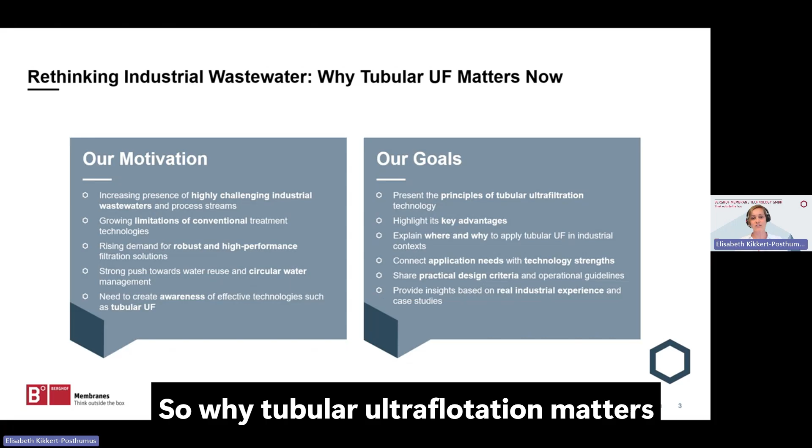So why does tubular ultrafiltration matter now? Our motivation includes a few bullet points we will go through: the increasing presence of highly challenging industrial wastewaters and process streams, growing limitations of conventional treatment technologies, rising demand for robust and high-performance filtration solutions, a strong push towards water reuse and circular water management, and the need to create awareness of effective technologies such as tubular ultrafiltration.

Our goals are to present the principles of tubular ultrafiltration technology, highlight its key advantages, explain where and why to apply tubular ultrafiltration in industrial contexts, connect application needs with technology strengths, share practical design criteria and operational guidelines, and provide insight based on real industrial experience and case studies.

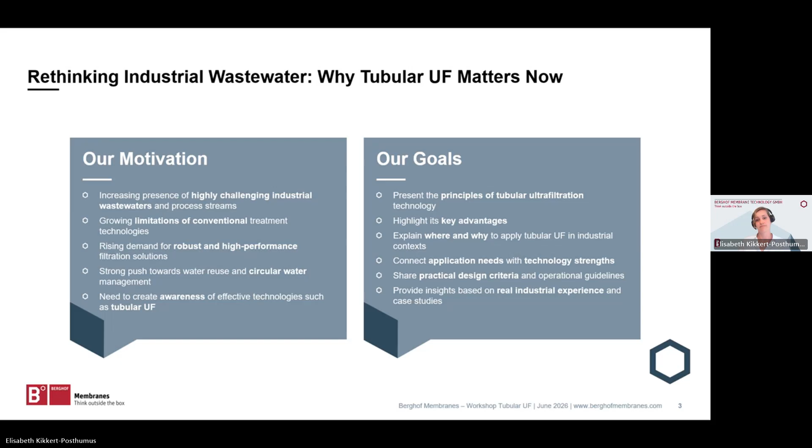Berghof Membranes is a leading manufacturer of tubular UF membranes for the filtration and separation of industrial wastewater and process streams, serving industries like dairy, food and beverage, landfills, chemical, pharmaceutical, biogas plants, oil and gas, and many others.

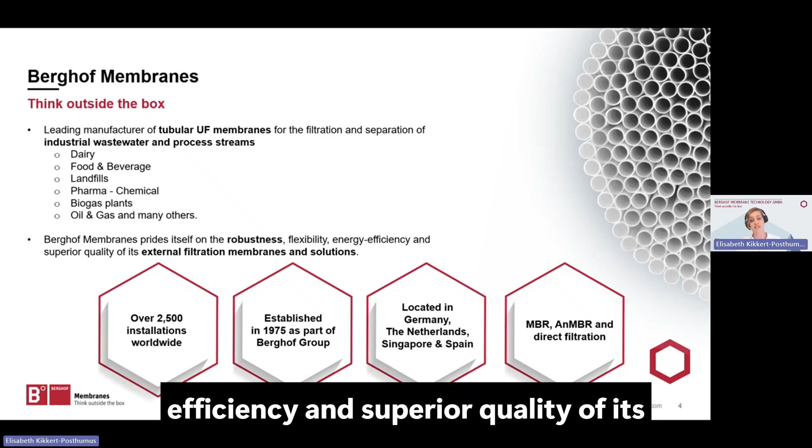With more than 50 years of experience and over 2,500 installed systems across the globe, we pride ourselves on the robustness, flexibility, energy efficiency, and superior quality of our external filtration membranes and solutions. We're located at 4 sites: Germany, our manufacturing location, and offices in the Netherlands, Singapore, and Spain. Our core technologies are MBR, AnMBR, and direct filtration.

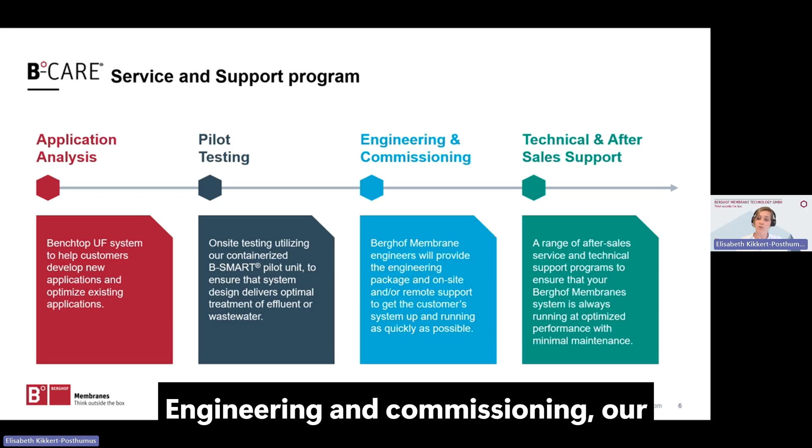Our B-Care service and support program involves application analysis, to develop and optimize our customers' applications; pilot testing, on-site testing with our containerized pilot unit, ensuring the system design delivers optimal treatment; engineering and commissioning, our engineering package with either on-site or remote support for starting the system; and technical after-sales support, a range of services to ensure the system always performs with minimal maintenance.

So let's get into detail and rethink the treatment of industrial wastewater and why tubular ultrafiltration wins. It's my pleasure to introduce our first speaker, Dr. Elena Meabe.

Elena is the manager of the Knowledge Center at Berghof Membranes. She is a chemical engineer and holds a master's degree in environmental engineering. She also holds a doctorate in industrial engineering, with her PhD research focused on membrane bioreactor technology and the monitoring of membrane performance. She has 18 years of experience in filtration technology, mainly dealing with external tubular membranes, and has deep insight into membrane technology for the industrial wastewater treatment market. She will now guide us through key insights on today's topic. Elena, thank you for being here, and I'll pass it on to you. The floor is yours.

Okay. So, hello, good afternoon. I will activate this. So I think now you can see my screen and everything is working well. Let me just do one thing. Okay, I think everything is going on.

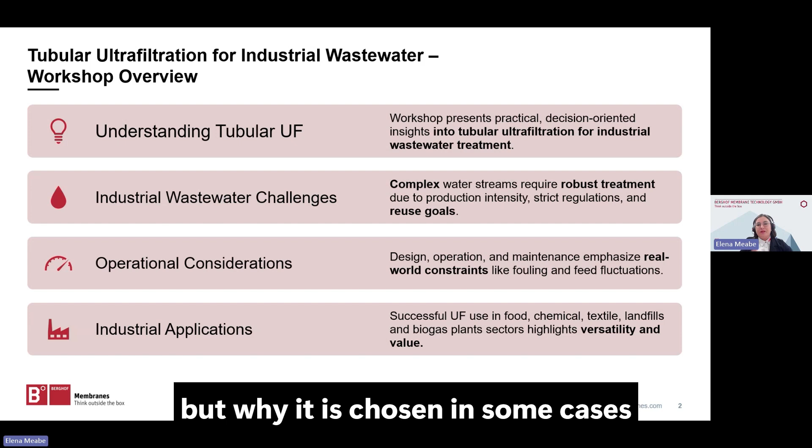the basis of this tubular ultrafiltration technology. So for this, we will start with the fundamentals of tubular ultrafiltration and then move into the main industrial wastewater challenges. We will also look at general design guidelines, operation, and we will finish with typical applications and specific case studies. So the intention is to connect membrane theory with real plant decisions, understanding not just how tubular ultrafiltration works, but why it is chosen in some cases and not in others.

So, well, industrial wastewater is fundamentally different from municipal wastewater. We are often dealing with high solids concentrations, oils, refractory organics, streams that can vary significantly depending on production cycles, batch operations, CIP events. So this variability creates shock loads that conventional systems often struggle to handle.

At the same time, discharge requirements are becoming stricter, water reuse is gaining importance, and many plants still face space and uptime limitations. So before selecting any technology, it is essential to understand the real complexity of the wastewater and the operational constraints around it.

So, well, the big question becomes, when does tubular ultrafiltration make sense? This is really about application fit, right? It is finding the right technology for the right challenge. And this is what we are going to explore in the next slides.

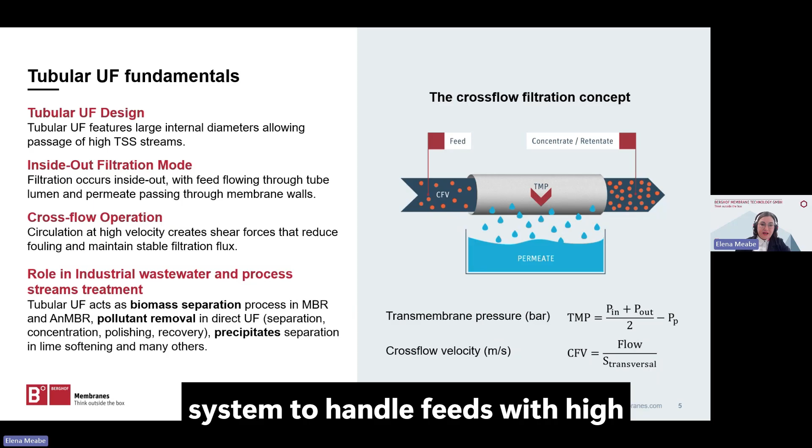So, well, the basis. Tubular ultrafiltration is defined by a few essential characteristics, okay? First, the channels, the membrane tubes, are relatively large, which allows the system to handle feeds with high suspended solids or viscosity. Second, filtration takes place in an inside-out mode, where the feed passes through the tube and the permeate crosses the

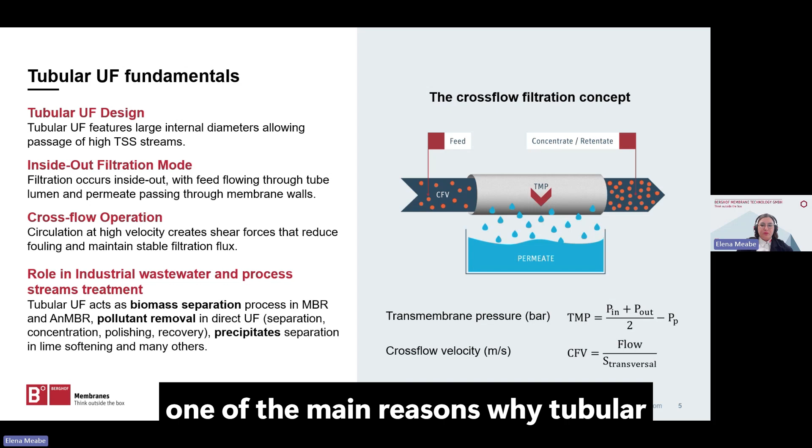membrane wall. And third, the system operates in crossflow, meaning that part of the liquid is continuously circulated to create a shear at the membrane surface. So this shear is key because it controls fouling and keeps filtration stable over time. This cross-flow concept is one of the main reasons why tubular ultrafiltration is considered robust for difficult industrial streams.

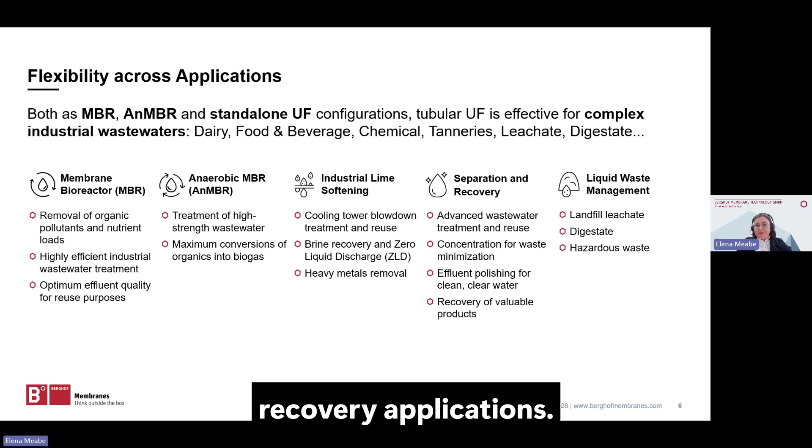Apart from this, one of the strengths of tubular ultrafiltration is the flexibility across many different process setups. It can be connected to a biological process as part of a membrane bioreactor or anaerobic membrane bioreactor. It can be coupled to a chemical precipitation process for removing hardness, silica, heavy metals, or other dissolved pollutants, or it can be used as a standalone ultrafiltration step for separation, concentration, polishing, recovery applications.

And well, the application range in terms of industries is also very broad, from dairy, food and beverage, chemicals, tanneries, leachate, digestate, waste management, many of them. So let's say that this is not a niche technology for one sector, but a platform technology for complex liquid streams.

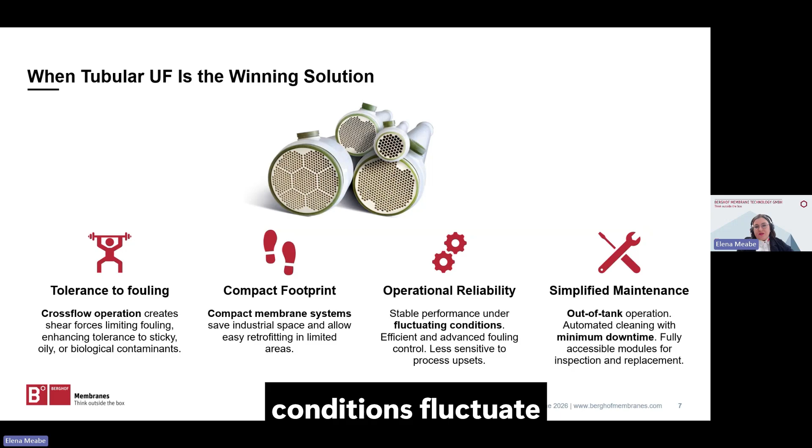Here in this slide, you can see that tubular ultrafiltration becomes a strong option under specific conditions, okay? So, for example, when the wastewater has a high fouling tendency, when available space is limited, when the feed conditions fluctuate strongly, or when maintenance needs to be simple and with minimum downtime. In this kind of scenarios is when tubular ultrafiltration excels and delivers its real advantages.

It is also important to say that tubular ultrafiltration is not always the lowest cost option from a pure CapEx perspective, okay? But in many challenging industrial cases, it becomes the most reliable and practical solution because it tolerates difficult feeds better and also provides more stable operation.

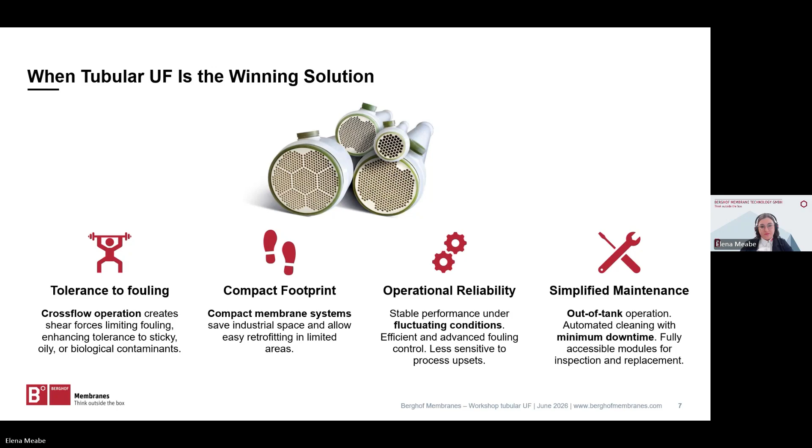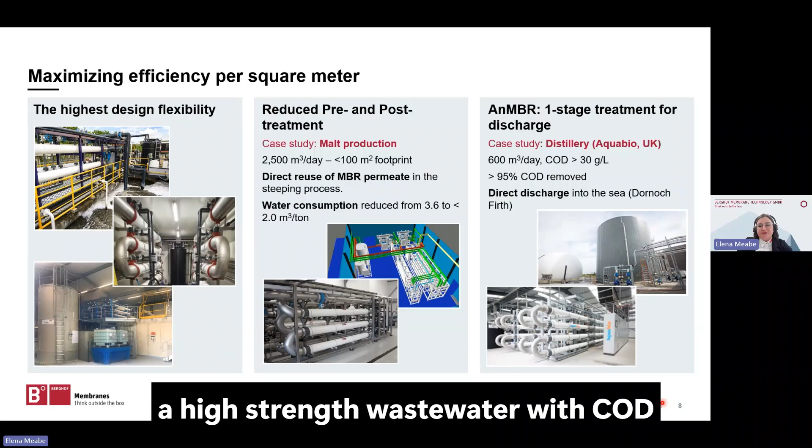this is a distillery application, a high strength wastewater with COD even above 30 grams per liter, which is treated with anaerobic MBR. So in this way, energy is produced for the factory. This system achieves COD removal higher than 95%, and this again enables direct discharge into the sea.

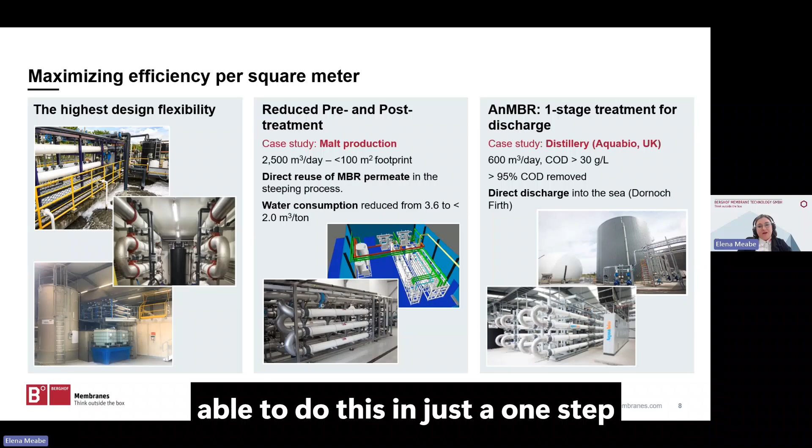Well, I can tell you that as far as I know, there is no other anaerobic technology apart from the anaerobic MBR which is able to do this in just a one-step treatment. Okay, so now we are going to move from why to how. Up to this point, we have focused on why tubular ultrafiltration can be the right choice. Now we move to the next step, which is how to design and integrate ultrafiltration properly into the treatment plant.

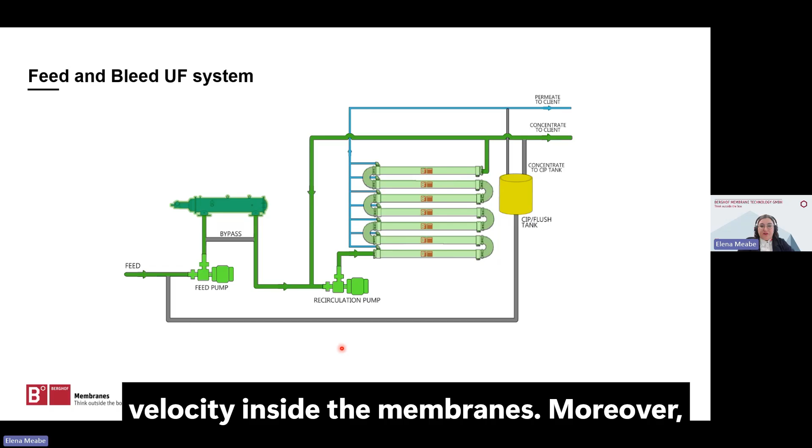This slide shows a typical feed and bleed configuration, which is the most common when designing tubular ultrafiltration systems. In this arrangement, there are two pumps, feed and recirculation, and there is a continuous recirculation inside the membrane loop. This is to maintain the cross-flow velocity inside the membranes. Moreover, the feed pump introduces a certain flow to the recirculation loop. Part of this flow is obtained as permeate, and the rest is the concentrate or retentate stream.

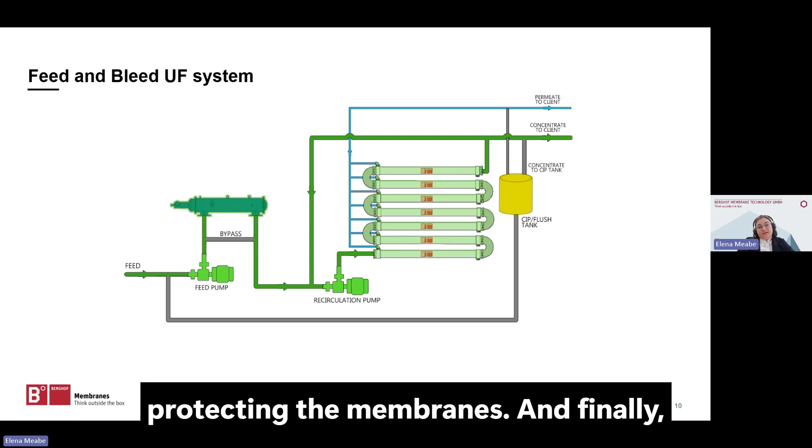The ultrafiltration modules are usually installed in series, usually up to 6 or 8, depending on the design cross-flow velocity. And also, we always recommend installing a safety strainer after the feed pump for protecting the membranes. And finally, the only thing that you need to install is the CIP flushing tank for membrane flushing and cleaning.

So when designing and operating a tubular ultrafiltration system, a few parameters are especially important. This includes transmembrane pressure, pressure drop, cross-flow velocity, recovery, concentration factor, permeate flux, permeability. But what matters is not only each parameter individually, but also how they interact. For example, increasing flux may improve productivity, but it can also accelerate fouling. Or increasing cross-flow improves fouling control, but it also affects energy demand. So optimization is always a balance between productivity, reliability, stability, and operating cost.

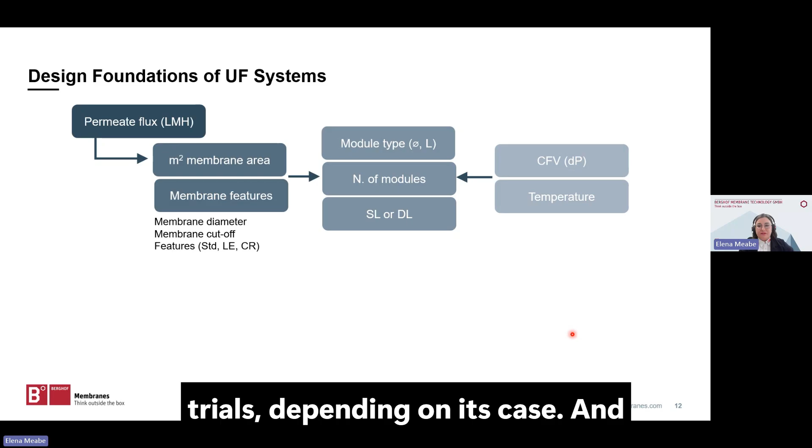System design. This is essentially about connecting process requirements to equipment selection. The main design parameter is the permeate flux. This value is determined based on background experience or pilot trials, depending on each case. And then, based on flux, we need to define membrane area. And also, depending on the application and the wastewater characteristics, we select the membrane type, diameter, cutoff, module configuration, for example, backwashable or chemical resistant modules.

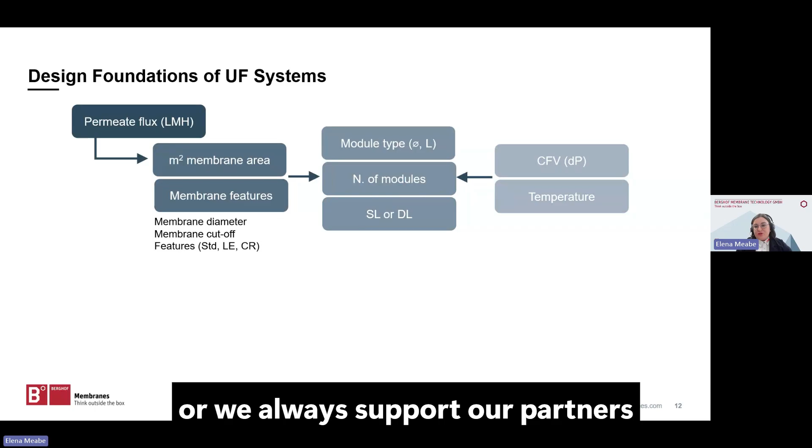Once we have this selected, we need to select the most adequate module size, diameter, and length. As a general approach, we try to select the smallest module which gives a reasonable number of modules in series. This is generally more energy efficient. I mean, it is better to install 4 modules in series of a certain size than installing just 2 modules in series with a bigger diameter. For all these kinds of decisions, of course, we always support our partners and customers in finding the best solution for each specific case.

Then, if because of the project capacity we need to install more than one skid, we can go for single loop or double loop. A double loop is like 2 membrane lines which are fed with the same recirculation pump. And also the permeate lines are interconnected. Double loop is better in general in terms of capex, but it can reduce flexibility, okay?

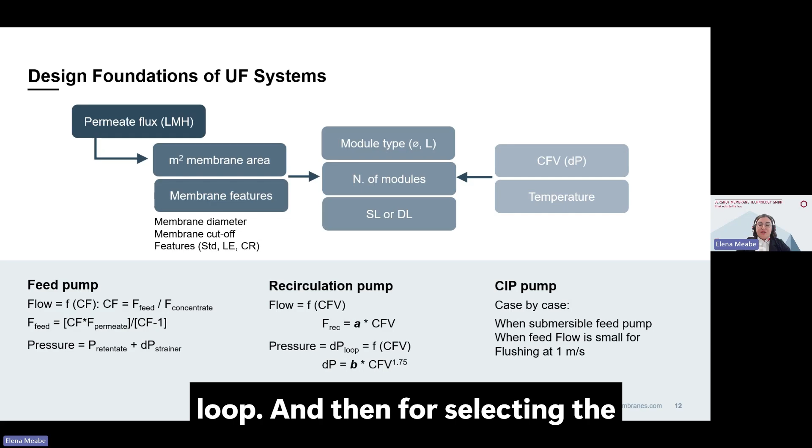Okay. On top of that, the pump sizing is critical. For the feed pump, the flow is based on the chosen concentration factor, which is the ratio between the feed and the retentate flow. And concentration factor sets the solids concentration inside the loop. For example, a concentration factor of 1.2 means that MLSS will get 20% concentrated in the ultrafiltration loop. And then for selecting the feed pump pressure, we need to consider the retentate pressure, which is the pressure at the outlet of the last module, and also the pressure drop in the safety strainer. Then the recirculation pump.

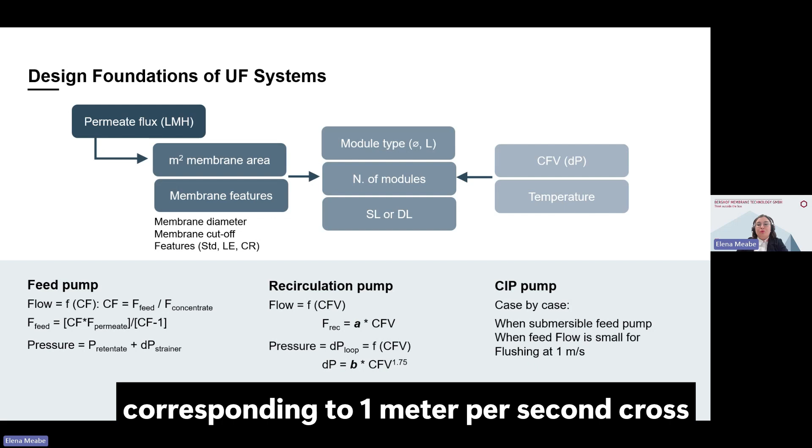The recirculation flow depends on the target cross-flow velocity. And the recirculation pump pressure is the pressure drop along the modules, which is also dependent on the cross-flow velocity. And finally, a dedicated CIP pump is installed in some cases. For example, when the feed pump is submersible, or in many cases when the feed pump is not able to provide the flow corresponding to 1 meter per second cross-flow velocity inside the tubes. This is the requirement that we have for the membrane flushing.

For me, the point here is that not every application needs the same level of complexity. So the system should match the technical demands of the process and also the operational expectations of the plant. So, operation mode. Tubular ultrafiltration is not limited to filtration alone. In addition to the filtration step, the system must also include other operation modes, such as flushing, CIP, conservation, and in some configurations, backwash or chemically enhanced backwash.

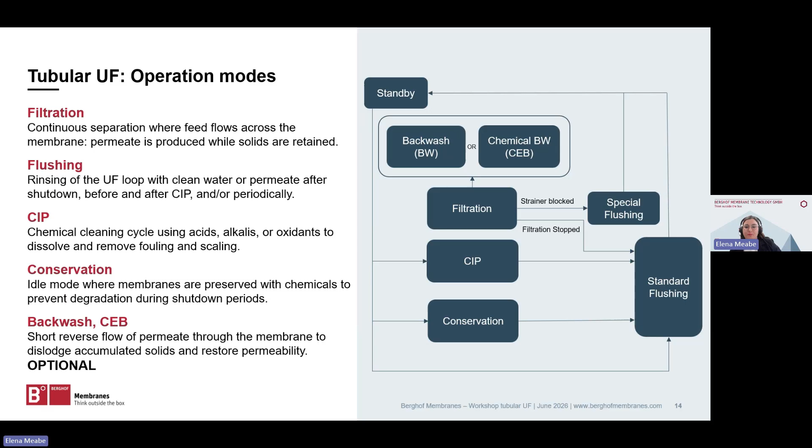Each of these modes has a specific role. Filtration produces permeate, flushing removes residual solids or pollutants when the system is stopped or before and after a CIP cleaning, or flushing can also be implemented periodically to control fouling. CIP restores permeability with chemicals, and conservation protects the membranes during shutdown periods. Then for flushing, UF permeate can often be used, but for CIP, we always recommend to use tap water or demineralized water. And moreover, when tap water is used, it should have low hardness, for avoiding scaling during the alkaline cleaning.

So now let's focus on the process integration around the UF. First, even though tubular ultrafiltration is very robust, it requires pretreatment. Pretreatment is still important. So typically some form of screening is required to protect the system from big solids or hairs, fibers, etc. As a standard, rotary drums with 0.75 or 0.8 millimeter mesh size are used. The screen should be square mesh or perforated plate. Slots are not recommended as they only provide the required sizing in one dimension.

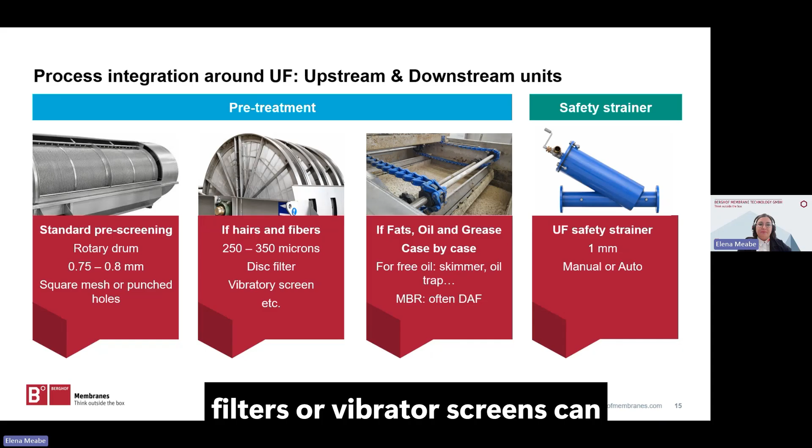Then, if hairs and fibers are present, a finer mesh is usually recommended in the range of 300 microns or even less. And for these, filters or vibrating screens can be used. Then, if fats, oil, and grease are present, additional pretreatment might be necessary in some cases. If there is free oil, we recommend removing it with simple equipment such as an oil trap or oil skimmers. Regarding emulsified oil, tubular UF membranes can cope with it. In fact, we have several projects dealing with oil-water separation where the membranes are facing really high concentrations of oil and grease, even more than 100 grams per liter. So this is not a problem for tubular ultrafiltration.

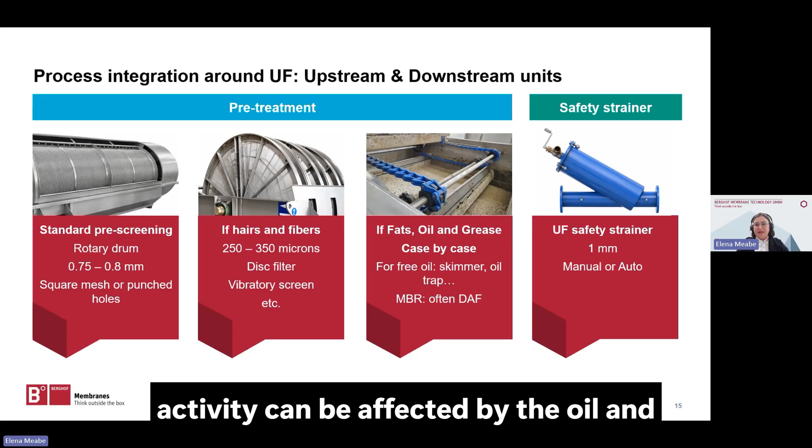There is a special case, which is the aerobic MBR, where DAF pretreatment is often installed when oil and grease is present. More than by membrane limitations, this is related to the biological reactor, where oxygen transfer and biological activity can be affected by the oil and grease, and also some kind of foaming or greasy superficial layer can appear on the bioreactor.

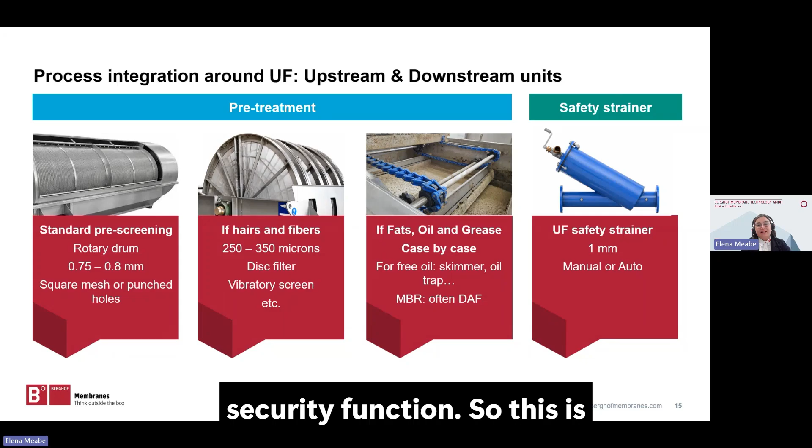Then, after pretreatment, we have the safety strainer in the UF system. We usually recommend a mesh size of 1 millimeter, and strainer cleaning can be manual or automatic. This depends on the case or on the customer's preference. Important: safety strainer mesh will always be bigger than pretreatment mesh. This is because pre-screening has the function of structurally removing debris from the incoming water. The strainers in the feed line of the ultrafiltration only have a security function. So this is important. Safety strainer mesh is always bigger than the pretreatment.

Finally, beyond the ultrafiltration system itself, proper integration into the overall process is essential. So upstream, the interaction with the feed tank or bioreactor must be carefully considered. For example, liquid height can influence pressure conditions in the ultrafiltration. With tall tanks, feed pressure is usually available, but retentate pressure will increase. So this means that in some cases, people even install a retentate pump instead of a feed pump. Or when retentate pressure increases, the maximum number of modules in series can also be affected. So this needs to be considered when designing a system.

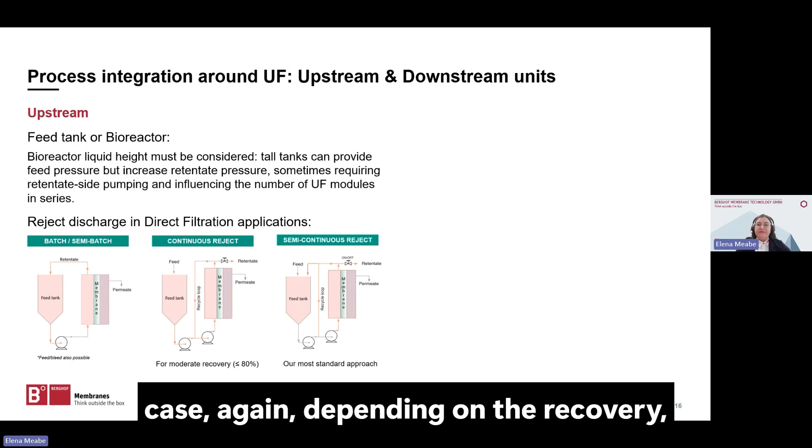We also need to think, for example, about how the concentrate or reject stream is handled in direct filtration applications. One option is batch or semi-batch operation, or we can extract the reject from the retentate stream, from the ultrafiltration loop. So in this case, again, depending on the recovery, the system can operate with direct reject or with partial recirculation to the feed tank and semi-continuous reject.

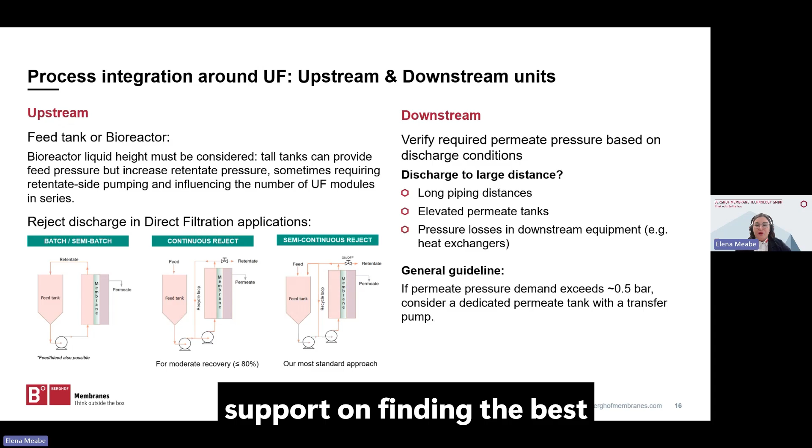Then, downstream side. The key question is the required permeate pressure. Long piping distances or elevation differences or additional equipment can create pressure losses in the permeate pipe. So, as a rule of thumb, our consideration is that if the required permeate pressure exceeds about 0.5 bar, it is often better to include a dedicated permeate tank with a transfer pump. Again, this can be customized based on each project, and we can also support on finding the best solution for each project.

And finally, when it comes to operation and maintenance, monitoring the right parameters is critical, as in any system. So we usually design ultrafiltration systems with permeate flow control. It can be done manually or automatic, but we recommend this mode of operation in terms of stability.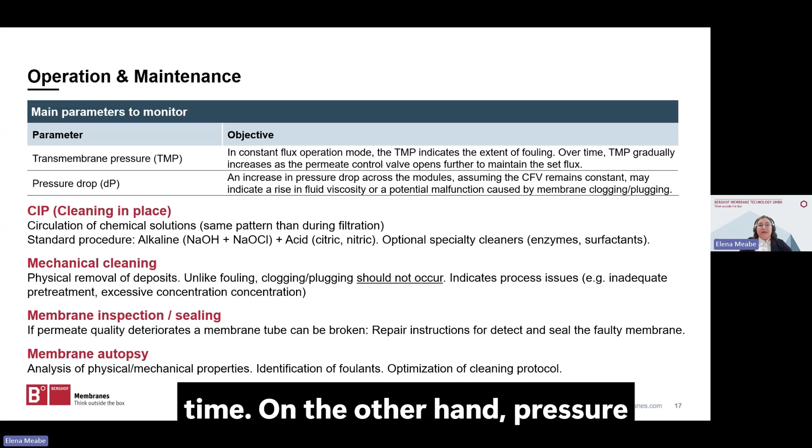So when you operate in a constant permeate flow, transmembrane pressure is the key indicator of fouling development over time. On the other hand, pressure drop across the modules needs to be also monitored, as it can indicate changes in viscosity, but also any potential clogging issues. So pressure drop in the loop is also an important parameter to monitor.

Then chemical cleaning. This is also an essential part of operation, because it needs to restore the functionality of the membranes. As you may know, standard CIP procedures typically combine alkaline oxidant and acid cleaning to remove organic and inorganic fouling. And in some cases, special chemicals such as enzymatic cleaners or degreasing boosters are highly efficient for certain circumstances.

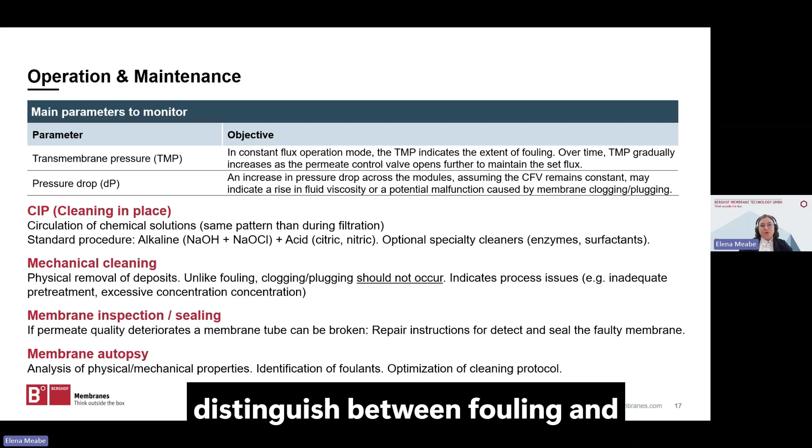Then we have mechanical cleaning. First of all, it is important to distinguish between fouling and clogging. Fouling is expected and happens in any membrane installation. You apply the CIP cleaning and the system is performing again and at its maximum, let's say.

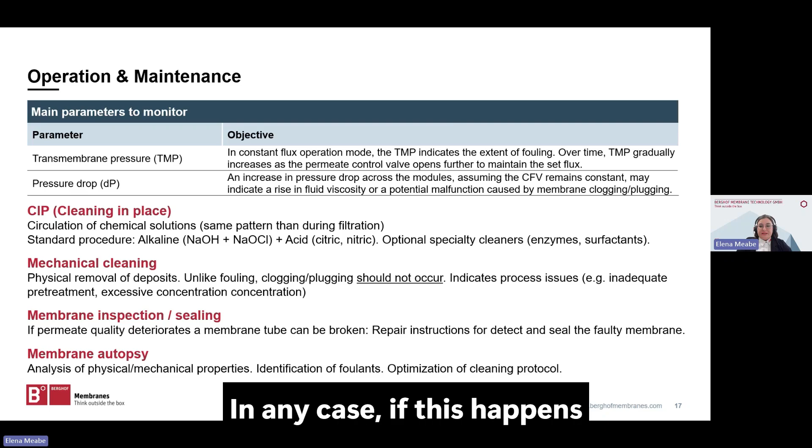But clogging, which is the mechanical blocking of the membranes, is something that should not happen and usually indicates a process or pre-treatment issue, some kind of operation which is not performing well. So clogging should not happen. In any case, if this happens for any unexpected reason, deposits can be removed physically with mechanical cleaning.

We also have procedures for the operators to inspect the membranes if required. And in the case that for some reason one membrane tube gets damaged, the module can be repaired with a simple procedure. So you can still continue using the module without any problem.

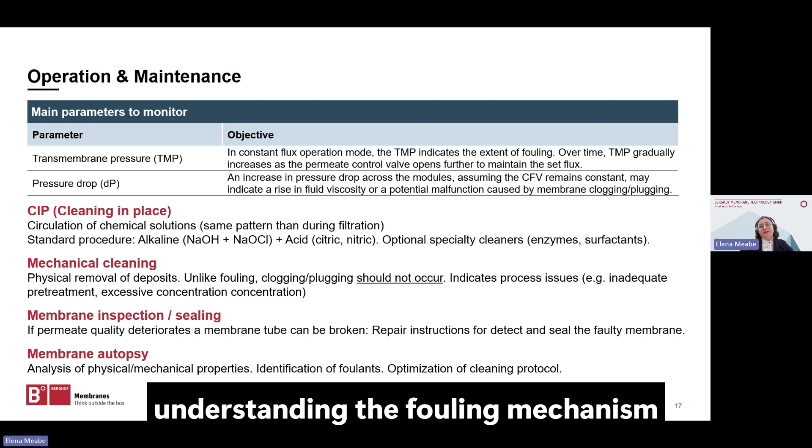And finally, as part of our services, we also offer the option to carry out membrane autopsy studies, which is something usually demanded by some operators. Basically, membrane autopsy helps better understanding the fouling mechanism and also, which is really important, optimize cleaning strategies.

So with this, I reach the end of my presentation. I would like to thank you for your attention. I hope that this session has helped you clarify when tubular ultrafiltration is the right solution and how to approach from the basis its design and operation. And now my colleague Adrian will go from theory to practice and will focus on typical scenarios and real case studies. Many thanks, and we will see you later again at the Q&A session.

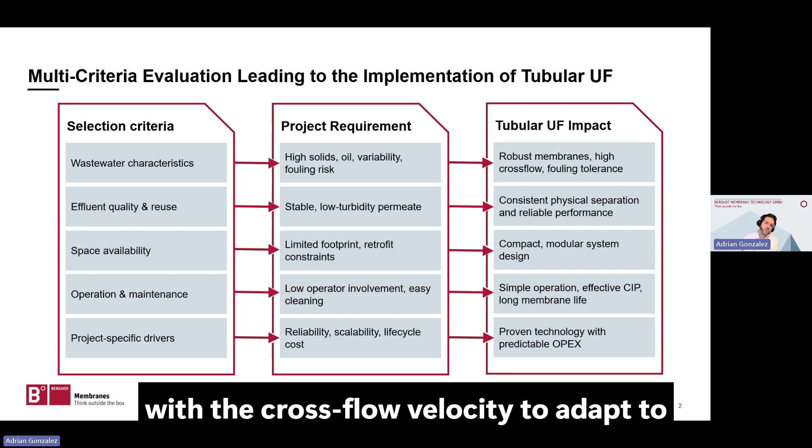For instance, when we look at the wastewater characteristics, in industrial waters which have either high solids, high oil and grease, high variability, high fouling risk, then the use of the external system is going to give a robust system capable of handling this fouling potential. We can play with the high cross-flow velocity, but also play with the cross-flow velocity to adapt to these challenging and variable conditions that industrial wastewater normally possesses.

If we then, for instance, look into industries where the effluent quality matters, or they are looking into permeate reuse, or a permeate that has low solids and is stable, in those cases, what we are going to be able to achieve by applying external membranes is a permeate free of solids, so low turbidity. And on top of that, it's going to have a constant permeate quality, even if the pretreatment is not working as well as it should.

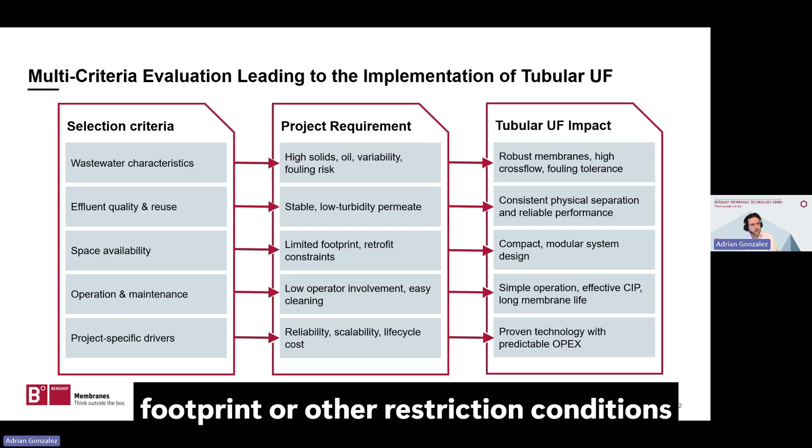Space availability. I think Elena showed already nice examples when limited footprint or other restriction conditions are in place. We can present a flexible and modular system. So you can think of skids on top of a bioreactor, on top of a platform, in the basement of a building. So always with these modular systems that can adapt to these space constraints.

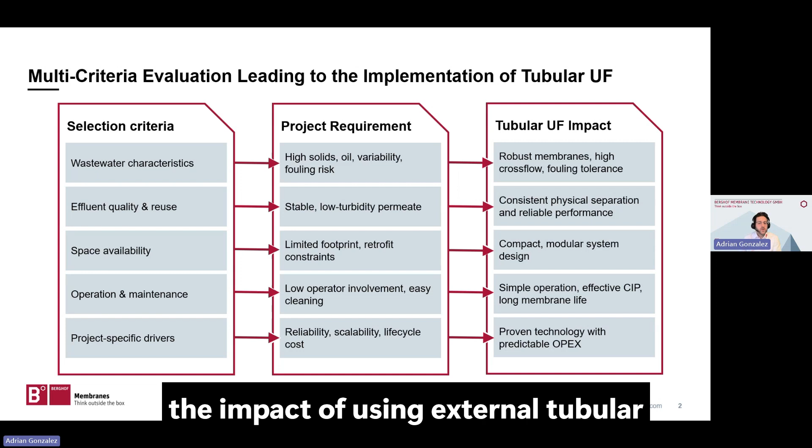OpEx, operation and maintenance. For sure, it's something that we and your clients are looking into these days. And by that, we are also thinking of the ease of operation of the system, and whether there are operators available on site to operate the systems. So again, using external tubular membranes is going to give a simpler operation with a long membrane lifetime. And there are many other selection criteria and project requirements that might lead to tubular being the winning solution compared with conventional treatment. But if one or two are present, then it makes sense to start thinking of external.

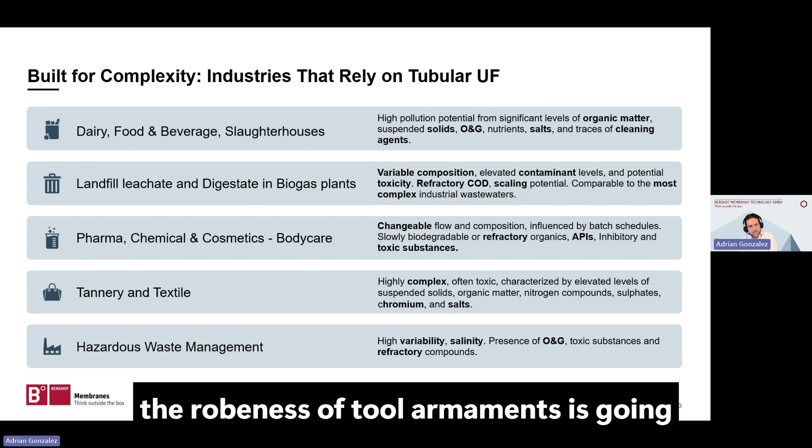Then landfill leachate and biogas plants. In biogas plants, we can think of the treatment of digestate or the anaerobic system, so anaerobic MBRs. Those are definitely the most complex waters we can think of, waters with variability of the influent flows, variability also in the composition, high levels of contaminants. So again, tough and challenging applications.

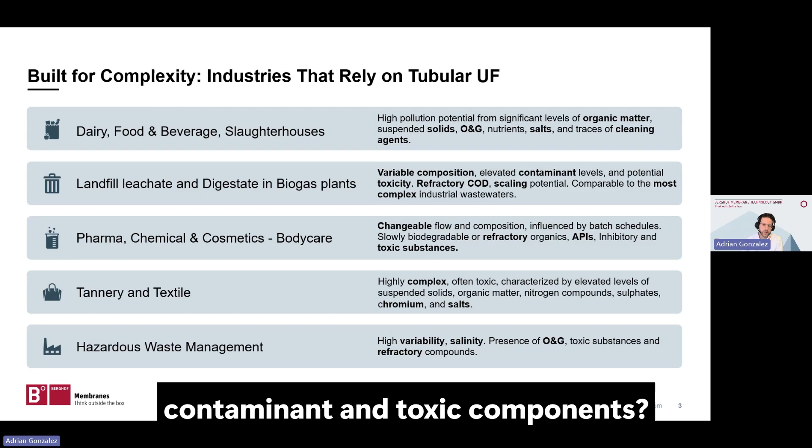At the same level perhaps as landfill leachate, we can think of hazardous waste, where there are streams of different natures. So chemical waste, paint, waters that have high levels of contaminants and toxic components. Not to stop here, but you can also think of pharma, cosmetics, laundries, industries where they operate in batches, where different products are being produced, which also means that there is variability in the composition of these waters that is going to affect the treatment being applied.

So we now have an idea of the selection criteria and project requirements for when we need to start thinking about applying external membranes. But perhaps it's good now to look at some case studies and examples where this has been the winning solution.

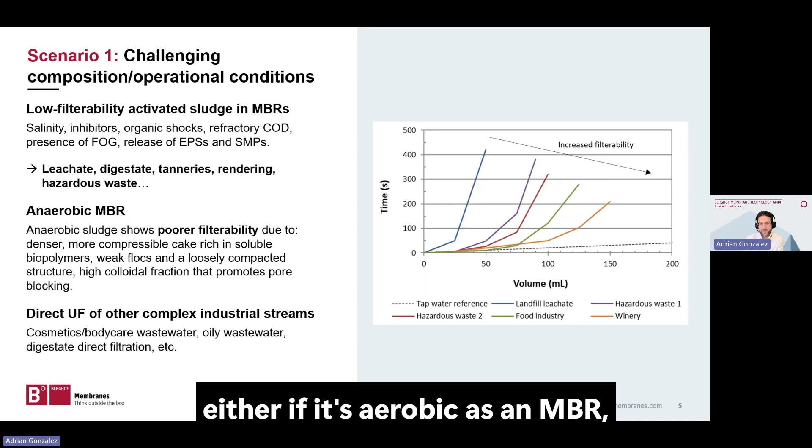First scenario, however, I'd like to focus still on a theoretical point of view. As Elena introduced briefly, external tubular membranes can be applied directly in contact with the wastewater, or in combination with a biological system, whether aerobic as an MBR, or anaerobic in the absence of oxygen.

When membranes are applied directly in contact with wastewater, we can think of many different industries. Cosmetics, for instance, to reduce the volume of waste generated and reduce discharge costs, or for further processing of digestate to remove the high suspended solids present in biogas plants.

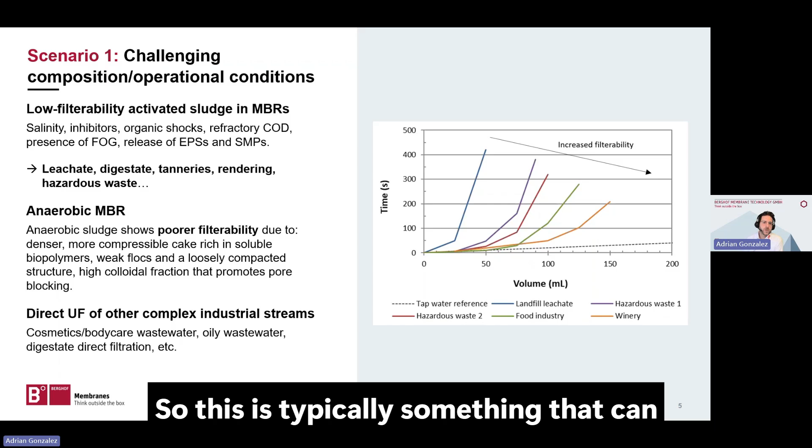From the point of view of MBR and anaerobic MBR, tubular membranes are a strong fit, especially in systems where sludge filterability is low and operating conditions are especially demanding. Think of waters with organic shocks, refractory COD, high salinity, inhibitor components, or where the biomass is releasing EPS, deteriorating the sludge quality. This typically happens in leachate, digestate, tanneries, rendering, and hazardous waste industries.

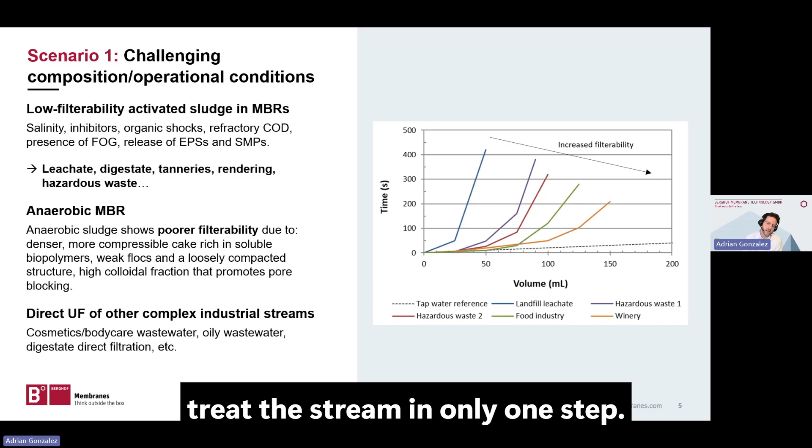In anaerobic systems, we again encounter challenging operational conditions, and in those cases only external tubular membranes are the right fit. Generally the biomass shows poor filterability, is rich in biopolymers, and has a colloidal fraction. In those cases, external membranes are the only solution, and as Elena said, they allow treating the stream in just one step.

Let's look at some case scenarios now, from a practical point of view, which I think is really the most relevant. First case: why does it make sense to reconvert a system, for instance, to an MBR?

Think of a client with an SBR or conventional activated sludge system. By reconverting this treatment, which might not be up to date, we can directly improve the biological performance and effluent quality, potentially for reuse strategies. So we improve not only the permit quality, but also expand the hydraulic and load capacity of the system if it's not capable of handling variable or increased loads the client might be facing.

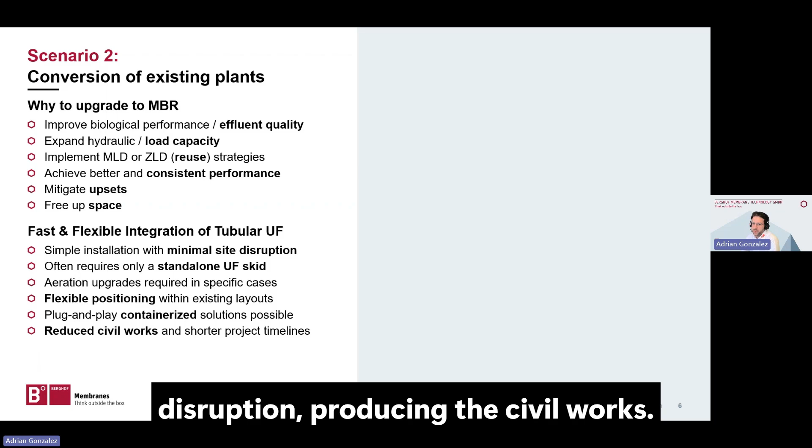The implementation of tubular membranes is fast and flexible. This can be integrated into a simple skid installation with minimal disruption, reducing civil works. In SBR systems specifically, the aeration is already ready for this reconversion, because it's normally designed for a shorter period of time, so when expanded to 24 hours, there's enough capacity for this.

Let's put this into a case study. This is a chicken slaughterhouse project in Belgium, executed by our partner, Aaqua. The client had a problem: they were facing an increase in capacity and had water costs they needed to look into reducing. Their current SBR system was not enough for this.

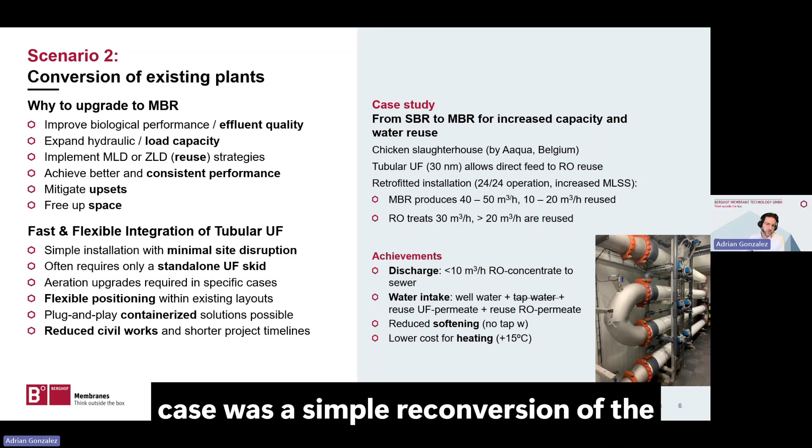The solution Aaqua presented was a simple reconversion of the SBR system, for which the aeration was already ready. It simply went to 24-hour-per-day operation, increasing the MLSS.

With this plus further treatment with reverse osmosis, they were able to face the increased capacity. Overall, the client is able to treat about 50 cubic meters per hour with the MBR system, from which 20 cubic meters per hour are reused directly for lower quality demand, such as floor cleaning and truck cleaning. The remaining 30 cubic meters per hour were further processed with reverse osmosis treatment, and from this, 20 cubic meters per hour were again reused within the process, in this case even for direct contact applications.

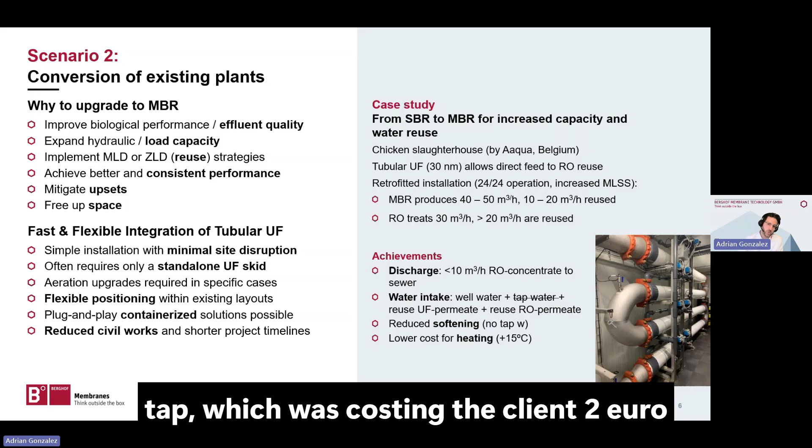The discharge of the reverse osmosis could be directly to sewer with even higher quality than the existing treatment plant. So with this simple solution of system, the client was able first to face this increased load capacity, to reduce the water consumption from the tap, which was costing the client €2 per cubic meter in this case. Actually, the quality of the reverse osmosis was even higher than the tap water, so avoiding softening, and the temperature was also higher, avoiding heating of the water.

Let's go now for a third scenario, where we focus on waters with high solids. Normally high solids also means high viscosity, it's correlated, and poor filterability. Those are systems where conventional membrane systems are going to fail to perform.

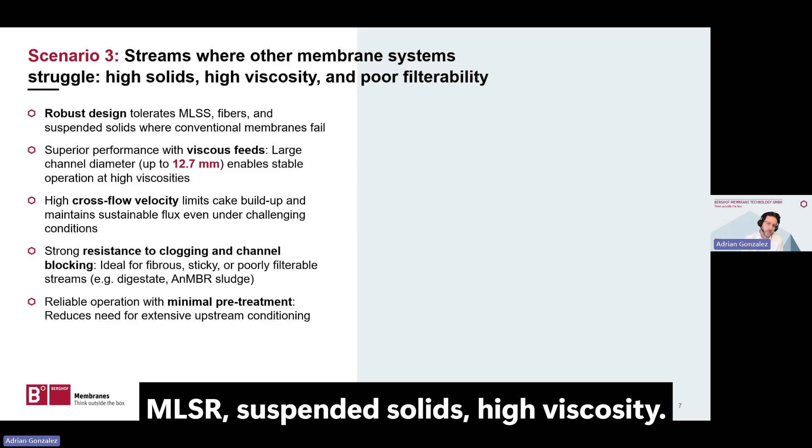You will need a system that is robust enough to handle this high concentration of MLSS, suspended solids, high viscosity. For this, we've developed a new series of membranes with a larger geometry, 12.7 millimeters. These allow us to work with high concentrations and avoid the risk of clogging. You can think of projects on digestate treatment or anaerobic systems where these concentrations are very high. This, in combination with the already high cross-flow velocities of our technology, helps reduce cake buildup while sustaining a higher flux over time.

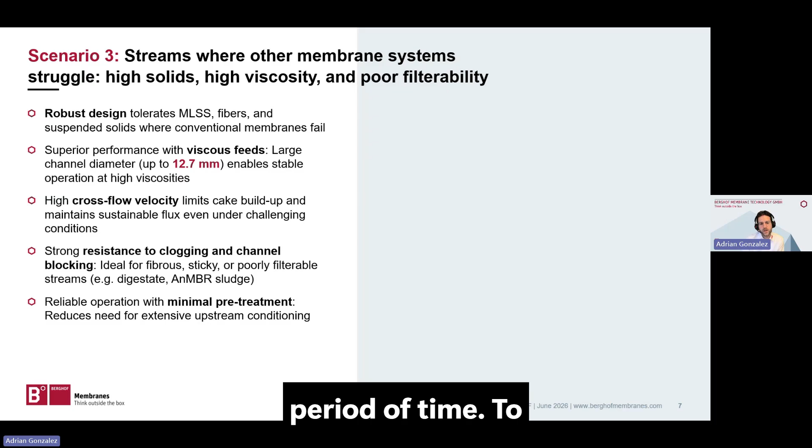To put this into a case study, I find this one very interesting from the beginning. The client's main focus was simply to recover PVC powder. This client was producing PVC, generating 720 cubes per day of water containing this PVC powder. It's also a nice case study because from the beginning there was a piloting to prove this was the right solution, highlighting that sometimes the best way to prove to your clients what is the right solution is piloting, which might be a very important step.

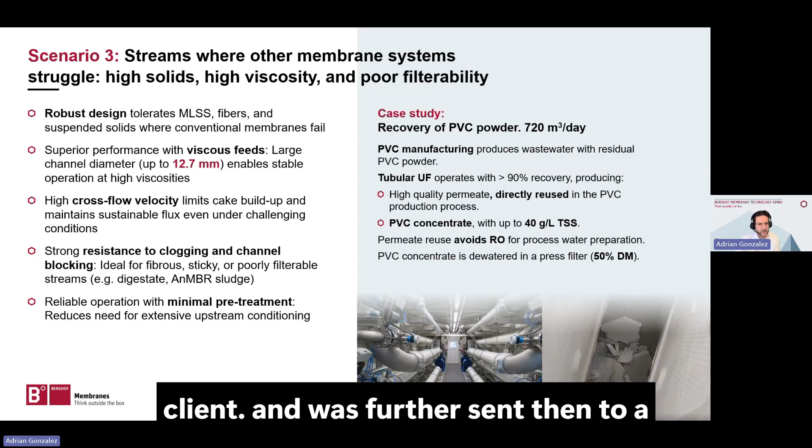After this piloting, we executed the project, consisting mainly of an ultrafiltration system able to concentrate this PVC powder. From 720 cubic meters per day, we were able to recover 90%. The reject, which is what the membranes were facing on nominal conditions, was up to 40 grams per liter. This reject was the main purpose for the client, and was further sent to a filter press to concentrate up to 50% dry matter.

The nice part of this project is that later on, towards the final stages, they also realized the quality of the permeate achieved with the ultrafiltration was high enough to be reused again within the factory. So they avoided having an additional reverse osmosis or softening of the tap water. A simple implementation, able to handle high concentrations of solids.

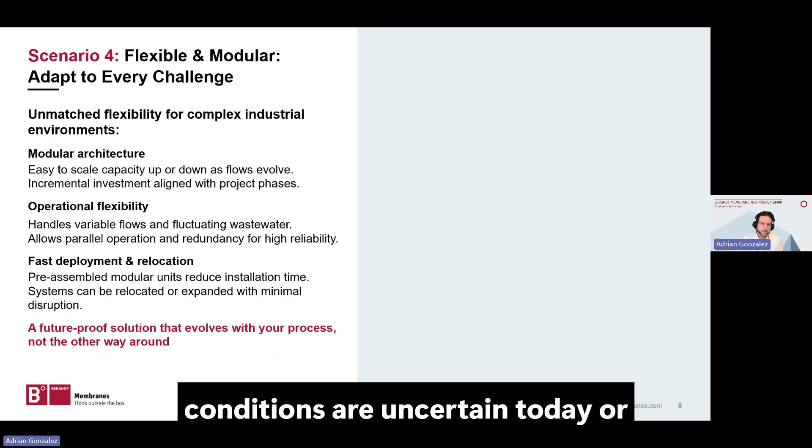Let's go now to a fourth scenario, where we focus on flexibility as the real value added by our technology. In those cases, tubular ultrafiltration offers a modular solution, especially in industrial settings where the conditions are uncertain today or likely going to change over time.

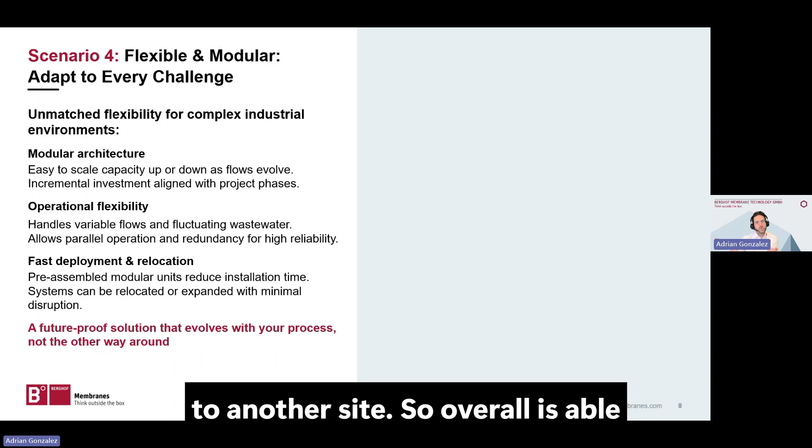This is often the reality in industrial wastewater treatment. So instead of fixing a design for today, we can look into a system that is future-proof towards potential expansions of capacity, site requirements, or changing legislation. In a way, we are also helping clients align investment with different project phases, so the capex is deployed over time. We can think of parallel lines, pre-assembled units that can be easily deployed on site and later moved to another site. Overall, it's able to offer high flexibility.

To highlight a case study where this is clearly exemplified: a landfill leachate in Saint-Pierre, France, a landfill active since 2004, in a project executed by our partner Ovive. In 2009 was the first stage, in which Ovive implemented a membrane bioreactor, a biological system with ultrafiltration, later coupled with nanofiltration. Just 5 years after this initial investment, there was already an increase of 50% in capacity.

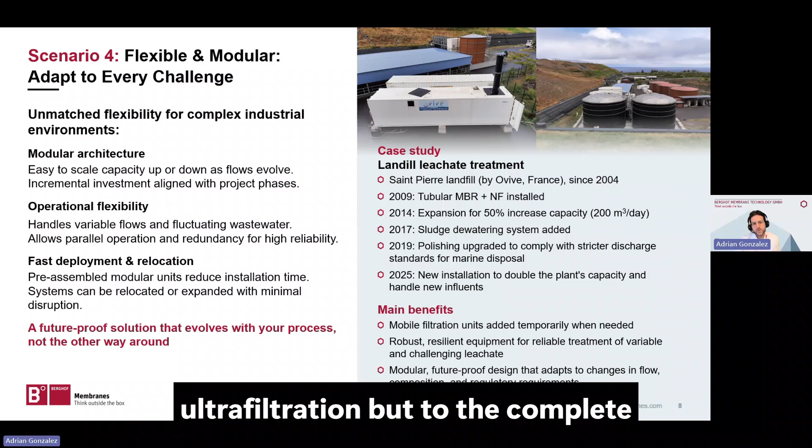Three years later, not related to the ultrafiltration but to the complete treatment, there was an upgrade in the sludge dewatering. Then in 2019, the restrictions for discharge into marine waters also increased, which meant the system had to increase the polishing required. Up to last year, there was again a second expansion of capacity.

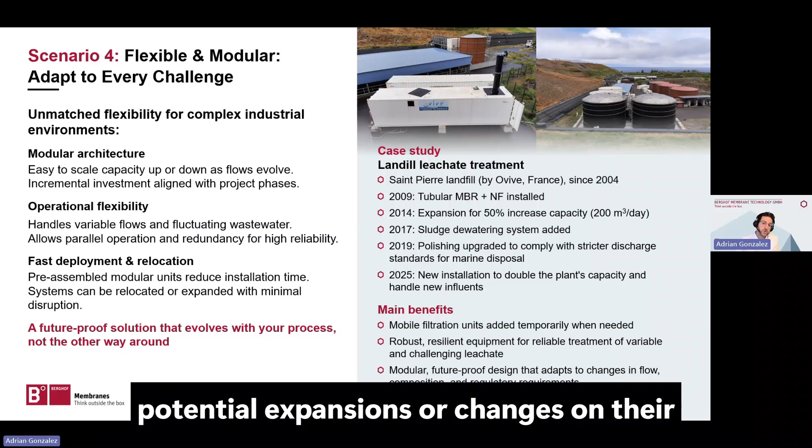I'm sure you're familiar with this, but especially in landfill leachates, there is variability not only in the influent flows but also in the quality over a period of 20 years, with complete changes. By implementing these flexible and modular solutions, we can adapt over time, and clients easily see the benefit in potential expansions or changes to their process over a period of a year or a few years.

If we move to scenario number 5, we will use dairy as an example of managing variability, tolerance to high oil and grease, and minimization of scaling issues.

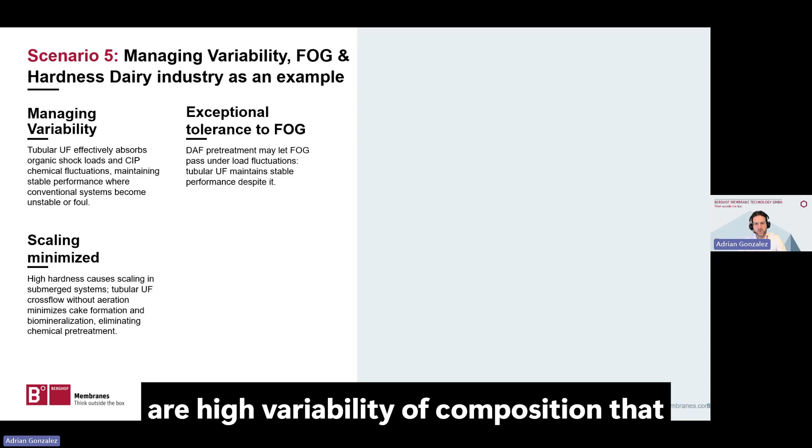A bit the same as was introduced in the previous case scenario, but in the industry overall, and in dairy in particular, the quality does not stay constant. There are large volumes that might come from different sources—raw materials production, spilling of trucks, losses loading trucks, cleaning, sanitizing, waste processing—so there is high variability of composition that can affect the quality of the treatment.

In cases where the pretreatment is not working well and is not able to handle these swings in quality, ultrafiltration can provide a safeguard. Despite that variability—for instance, in a previous DAF treatment dealing with oil and grease—the performance of the ultrafiltration system is still going to remain stable.

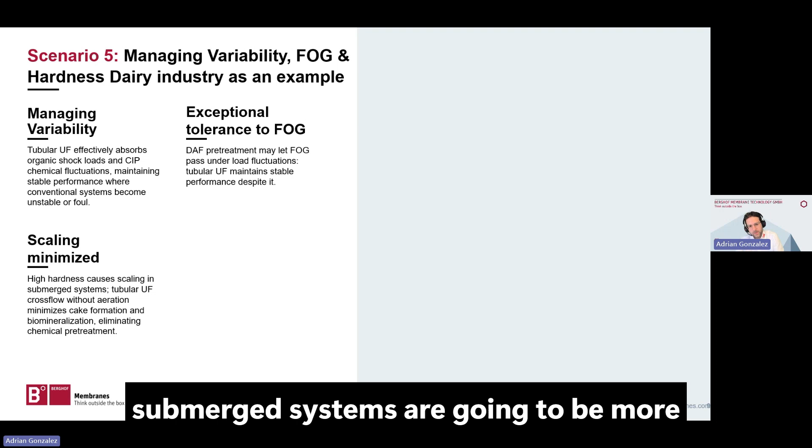In dairy, we are not only talking about oil and grease but also about hardness, which is always high in this type of application. In those cases, submerged systems are going to be more exposed to scaling, cake buildup, and biomineralization, while in contrast, external systems using cross-flow technology, as Elena introduced, rather than aeration to control this deposition, can reduce the formation of cake on the membrane layer.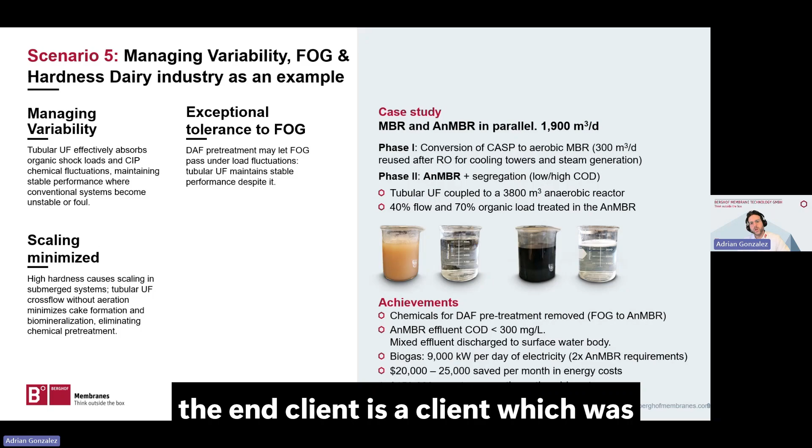To exemplify a case of working with high concentrations of solids, oil and grease in the dairy industry, we focus on a project in the States. The end client was producing butter and butter derivatives, generating around 2,000 cubic meters per day of wastewater.

The client already had an existing treatment consisting of a DAF unit plus a conventional activated sludge system. This system presented several problems at that moment: high consumption of chemicals in the DAF system, generating high volumes of sludge which needed to be disposed of or further treated, plus the high variability and swings in the DAF system meant the quality of the conventional activated sludge was also not good enough.

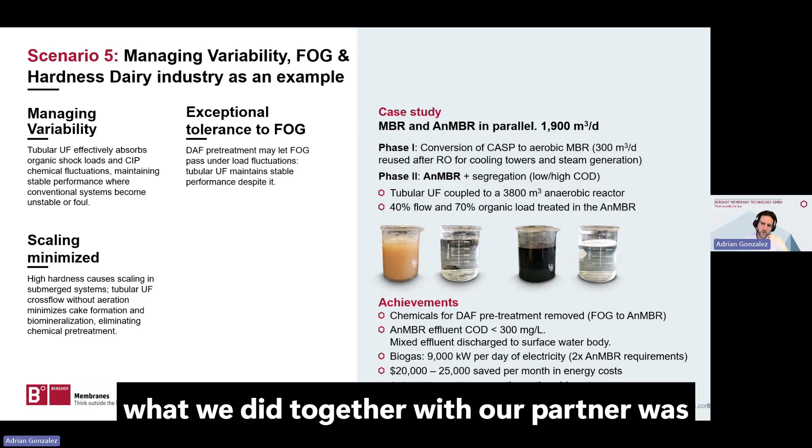In a first phase, what we did together with our partner was simply to reconvert this conventional activated sludge into an MBR system. With this, we were able to handle the variability of the pretreatment and still achieve a stable and constant permeate quality, which is, after all, much more operator-friendly.

The permeate from this MBR was further sent to a reverse osmosis system, and the client could reuse the reverse osmosis permeate within the factory, for the cooling towers, steam generation, and other parts of the process. The nice part of this project is that in a second phase, around 5 years after the initial reconversion to an MBR system...

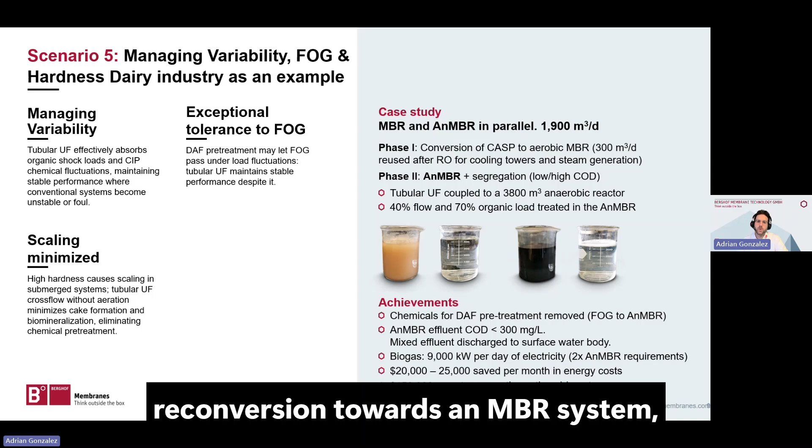...there was a segregation of the different waste lines within the plant—low strength wastewater and high strength wastewater. The high strength wastewater was segregated and sent to a new anaerobic bioreactor system. This anaerobic system, of 3,800 cubic meters, could treat, using only 40% of the total flow, 70% of the organic load—loads that could reach up to 40 grams per liter of influent.

The quality achieved by the anaerobic system, under nominal conditions, was below 300 ppm—a very high removal efficiency for an anaerobic system in only one step. Of course, with an anaerobic system, they could also produce biogas, which could be converted into electricity.

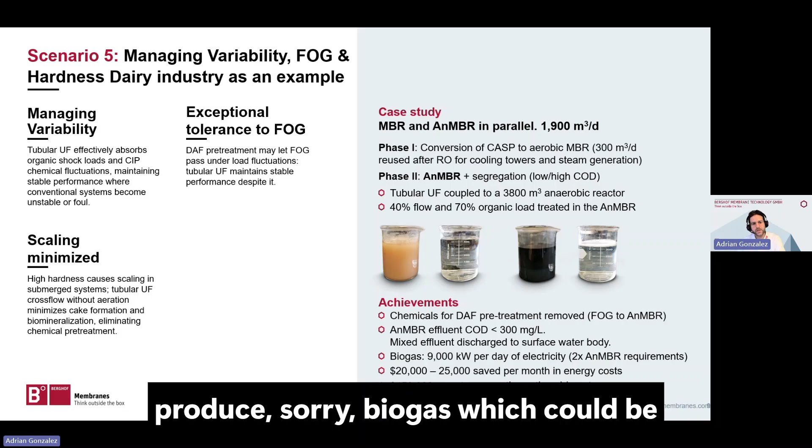I will present now the sixth and final scenario, focusing on limited space and high concentrations of solids as the selection criteria for this particular case. For that, I will focus on reverse osmosis brine recovery or ZLD type projects.

In these projects, there is a combination of chemical precipitation at high pH before the ultrafiltration, so dissolved components can be converted into solids and precipitated directly in only one step with ultrafiltration. Due to the high pH in this chemical precipitation, we developed a new product line capable of working in nominal conditions up to a pH of 12.

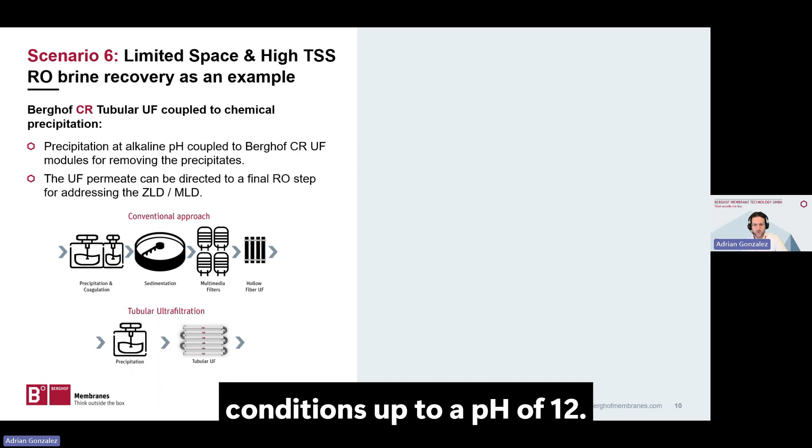Compared with conventional treatments, ultrafiltration tolerates these high solids while achieving full removal of suspended solids in only one step. Conventional treatment uses chemical precipitation with flocculants and coagulants, while in our case we can rely only on common chemicals like lime and soda ash, already reducing 20-30% of chemical consumption and capex.

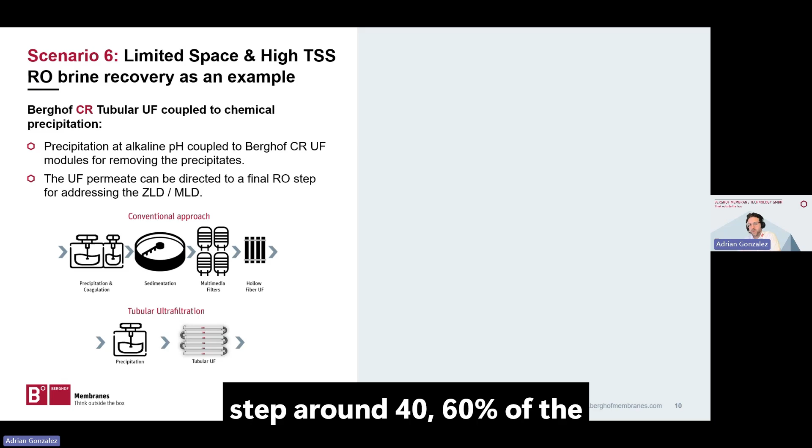Then, in only one step directly after this chemical precipitation, we go to the ultrafiltration. There is no need for sedimentation, plus multimedia, plus hollow fiber. This presents a second advantage, because in only one step we can reduce around 40-60% of the footprint, resulting in a much simpler system.

To show a case study for reverse osmosis recovery, this is a project in China. The end user was facing stringent water requirements for water reuse and was looking for the most cost-effective solution to treat the reverse osmosis concentrate, focusing on a ZLD project.

They also saved 20 to 30% of the chemicals used in chemical precipitation compared with the conventional approach, while still working at high concentrations of solids—20 to 30 grams per liter seen by the ultrafiltration system in nominal conditions, with very high fluxes. This is a type of application that more and more industries are deploying toward zero liquid discharge policies.

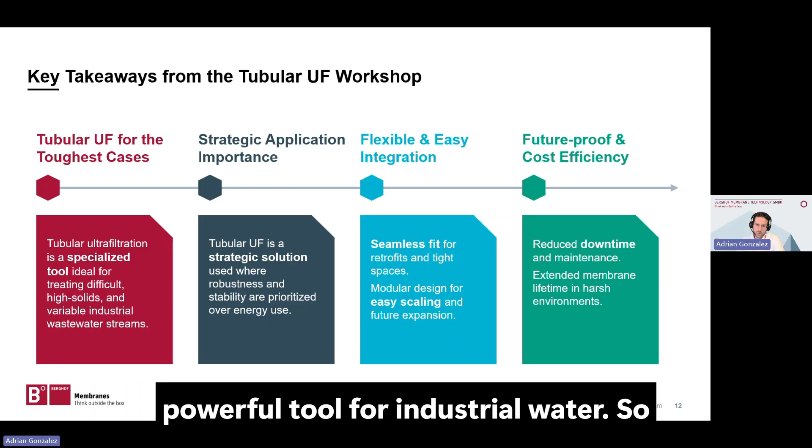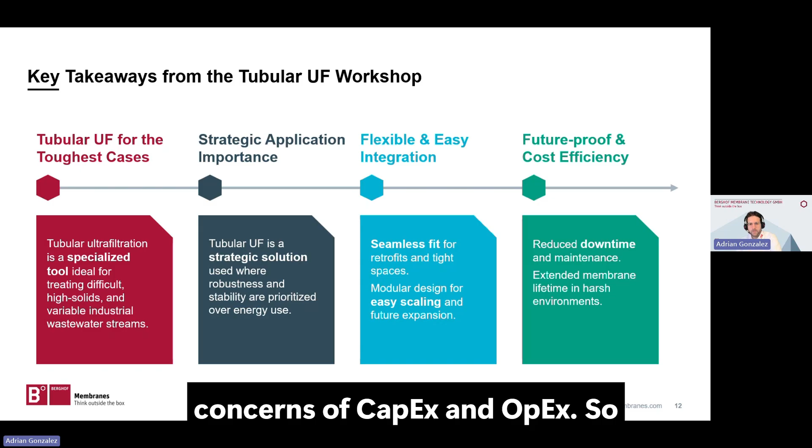The more complex the water or the tougher the case, the better it suits this system. The value is highlighted by handling high concentrations of solids and variable streams, where other technologies struggle to operate. Tubular ultrafiltration systems should not be seen as just a default choice, but as a strategic solution where robustness, flexibility, modularity, and stability of permeate quality outweigh concerns about capex and opex—overall, a solution that is cost efficient and future proof.

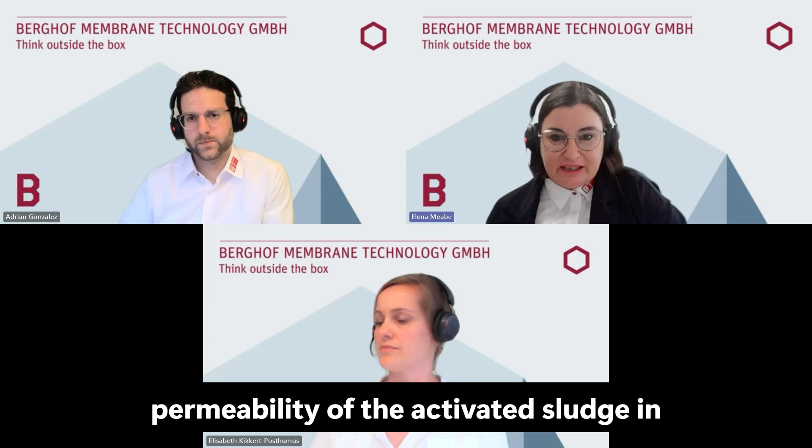Having said this, we have seen cases where there has been some kind of operational issue which has led to overdosing of chemicals, where yes, you can see a decrease in the permeability of the activated sludge in the case of an MBR, but there is not a huge impact on the membranes. And if this is the case, you can apply a chemical cleaning and everything is solved quite easily.

I would like to highlight that in some of these scenarios, our experience is that applying some types of enzymatic cleaners is helping to restore the functionality of the membranes. Okay, perfect. Thank you.

Okay, so the next question, Elena, is also for you. Is there no relaxation step like for submerged membranes for this type of membrane? Okay, this is yes and no. In conventional cross-flow operation, what we call B-Smart performance, there is no need for implementing any kind of relaxation or backwash sequence. It is the cross-flow velocity that allows us to minimize fouling and operate with really high fluxes of 80, 90, even more than 100 LMH.

On the other hand, we have what we call B-Smart Eco, which is an approach for reducing the energy consumption, with systems designed to operate with lower cross-flow velocity. When this is the case, we do have to implement relaxation and/or backwash sequences, or also chemically enhanced backwash. So in conclusion, relaxation and backwash are only needed when we are designing for a low cross-flow velocity condition, something like less than 2 meters per second cross-flow velocity in the membranes.

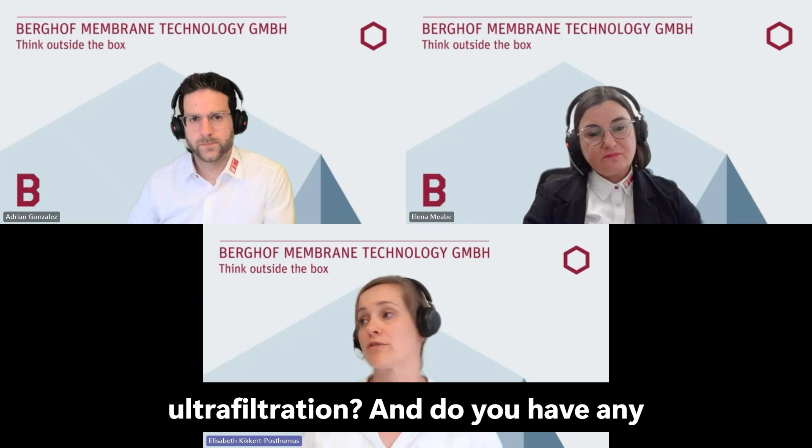Great. Okay, thank you. There's another question for Adrian. Is it possible to treat reverse osmosis concentrate through tubular ultrafiltration, and do you have any real cases? Yes, we actually have many case studies, just like the one I showed for the soda ash manufacturing in China, where they were explicitly treating reverse osmosis concentrate, but also in power plants for the blowdown from the cooling towers, and also nanofiltration brine and reverse osmosis brine from landfill leachate. So it's overall a technology that we have in our portfolio.

For these systems, as I mentioned before, one of the important points is that the pH of the previous chemical precipitation, especially for removal of the hardness, is higher than 10. For that, we need to think of the CR membranes to be applied in those cases.

Okay. There's another question for you, Adrian. What's the average membrane pore size? I would say for 90% of the cases, the standard 30 nanometers is going to be applied, especially for membrane bioreactors, either aerobic or anaerobic. The main focus there is removal of the suspended solids or the biomass. So 30 nanometers is going to be highly applied. You will be able to remove suspended solids and some of the colloidal matter.

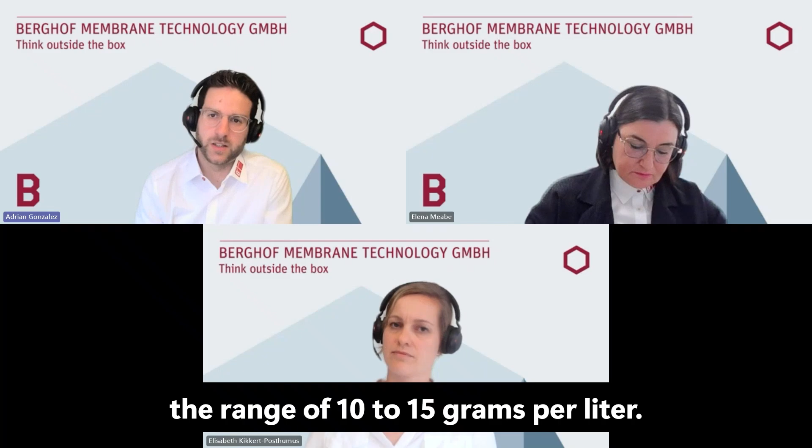Okay, thank you. Elena, another question for you. Can the effluent from the anaerobic MBR be polished directly with reverse osmosis?

Yes, yes, absolutely. In fact, we have some projects where they are specifically doing this, and the permeate, the effluent from the anaerobic MBR, is always having SDI less than 3. COD concentration is pretty low, so there is not a problem with that. And we have some cases where reverse osmosis is performing very, very well with high recoveries and no problems.

In fact, I would say that we even have cases in worse conditions, such as the treating of digestate, where ultrafiltration membranes are used for the direct filtration of digestate, so that permeate is still having a significant amount of soluble COD and other components. And in these cases, our customers are also applying reverse osmosis directly after the ultrafiltration.

Having said this, you need to be careful when designing the reverse osmosis, selecting the proper RO module, but this is something that can be done and operated very, very efficiently. Okay, thank you.

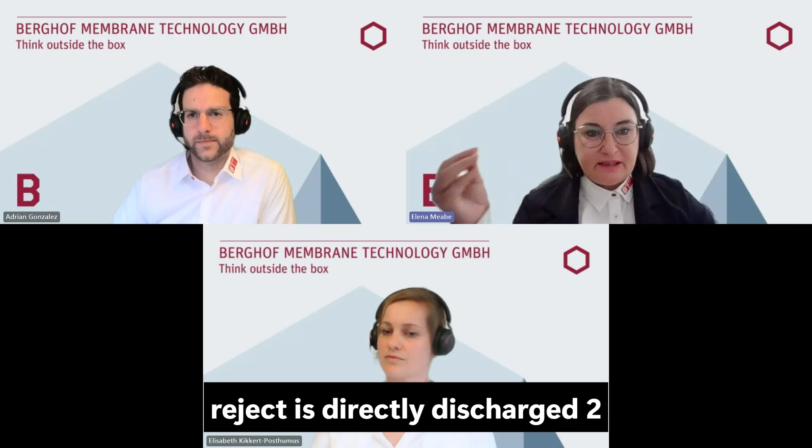For direct filtration, this is a different topic because in direct filtration, we can have what we call direct reject. So we are feeding, let's say, 10 cubics per hour, permeate is 8, and reject is directly discharged, 2 cubics per hour. So the concentration factor is the one corresponding to the global process. In this case, it would be 5.

In other cases, when we operate with semi-continuous reject, we usually apply a concentration factor in the range of 1.5 for providing the system with flexibility in terms of permeate production. So it can be between 1.1 and 1.5, and in the case of direct reject, this concentration factor comes directly from the global mass balance.

Great. Good. Okay. And sorry, Elisabeth, last question from Adrian for scenario number 6. How do you handle the precipitate in this scenario? I presume he refers to the potential scaling, I don't know, or if it is the precipitates that come from the previous precipitation process.

Perhaps to highlight here is that it is important that the chemical treatment, or the physicochemical treatment where there is a precipitation of the solids before the ultrafiltration, is also properly designed, so there is enough retention time for them to precipitate, and there is good mixing of this feed tank before the ultrafiltration. Normally we also operate with an intermediate tank between the chemical tank and the ultrafiltration. So there will be the chemical precipitation tank, which is well designed for mixing and retention time, then the feed tank before the ultrafiltration. So if I understand correctly, that is the way to handle this precipitate.